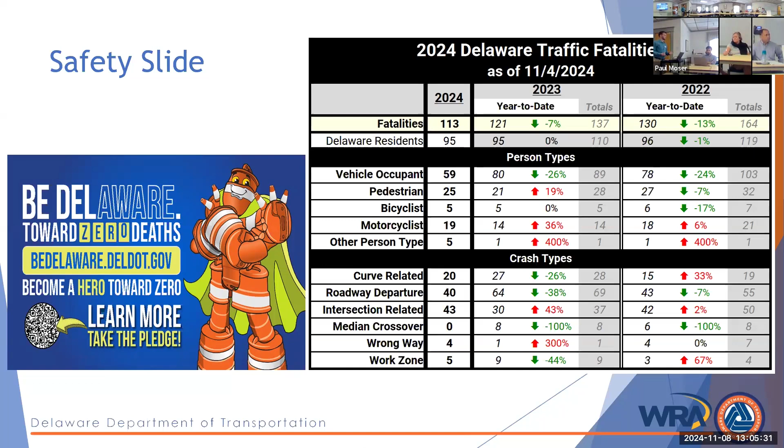Just a reminder to continue to be cautious and be safe on the roads, all the things we know we're supposed to be doing, but sometimes we take for granted.

And then we will go from there, and I'll bring up Andrew to walk us through some of our agenda. Do I need to be up there, Leah? You don't have to be. All right, I'm gonna stay here then. Someone else. Does that mean you have to? I can advance, yeah. Well, yeah, I don't wanna make you up there. Well, actually, you're gonna be coming up in a second anyway.

Hi everyone, Andrew Bing. I help DelDOT with a lot of these efforts in terms of facilitating meetings, keeping things going, staying on track. So that'll be my role here if I interrupt someone or try to keep things moving. That's why I'm here, to make sure we get out at a reasonable time.

So you see the agenda up here in terms of what we're going to do. The first two areas, the welcome and the study area, background and scope. I will be having us go around and introduce each of us. But again, I am Andrew Bing, and we'll be taking on that role. So we're going to focus on the study area, but then spend time with existing conditions and key issues.

Probably the bulk of our time will be spent in this visioning session, where we really want to get as much out of you as we can in terms of what you see happening now. How do you currently get around destinations on 16? We're making that transition from the active transportation plan to really starting to focus on 16 and how you all interact with it. And what do you want to see in the future for 16?

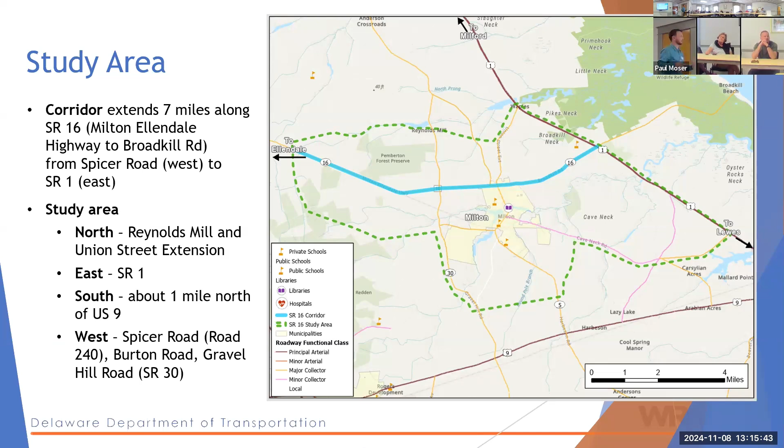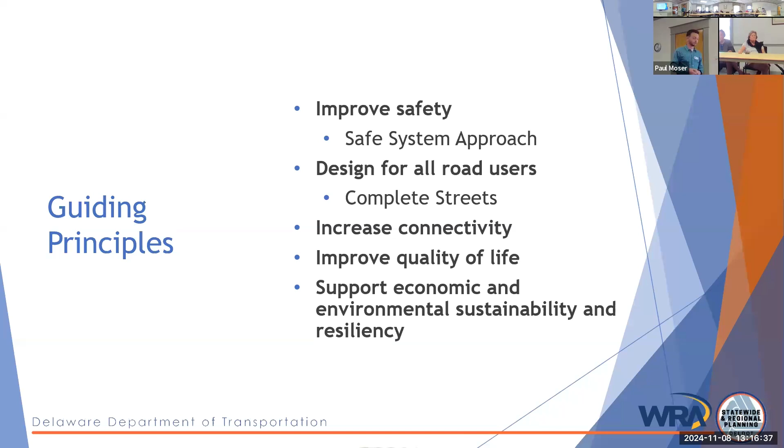In terms of the scope of the project, right now we're working on phase 1, which will go through June of next year, the end of state fiscal year 25. Again, this is a focus on the 16 corridor as it exists today.

Looking at understanding what traffic looks like through the area right now, identifying some of those potential short and long-term improvements. As a result of that, this phase of the study will come up with some preliminary concept designs for the town, for short and long-term improvements. Those will all be documented in a report.

As a side note, this is being coordinated with the ATP, which you all are a part of and have been contributing to. The goal of doing these projects at the same time is that they will have elements that connect and relate to each other, which helps us bring a more comprehensive understanding of the project as a whole to you all when we think about solutions and improvements and things like that.

Then the next phase of our study, which will continue after the ATP is complete, we'll be looking at what kinds of improvement alternatives could come out of something different, right?

So we talk about, we understand, if we're going to change the design of 16 and what kind of traffic and modes it supports, what does that mean for what kind of traffic does the road handle, right? Understanding capacity, things like that. And so looking at and understanding what kinds of alternatives could be implemented to solve issues that came up with our design of 16, what that might look like for you all. So understanding those improvements, understanding what we might need to put in place short and long term. And then as a result of that, we'll put together some concept designs and report those findings and talk about next steps with you all.

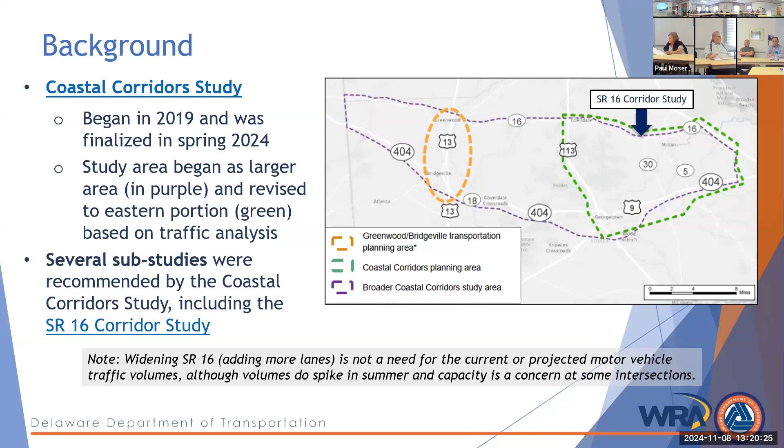Pretty much what I've seen is any traffic problem that you can identify in Milton, if you take time and go to any other small town in the region, you can find the same traffic problem. So we're not by ourselves here. That's for sure, some people's popular opinion.

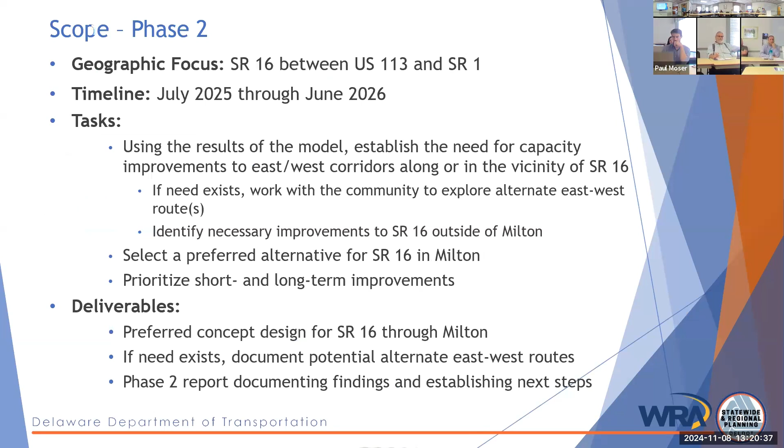Is there someone online who, I saw you guys looking, no? Okay, Jamie Whitehouse from the county has joined us. Okay, great. So we're gonna bring Leah up and we're gonna go over some of those existing conditions.

And spend a little bit more time on some of the things you were just raising. I'm here. Thank you, and Mayor, thank you for raising that point. For those of you who are interested as to how we reached that note conclusion, the coastal corridor study is online and fully documents how we got there. And I will say, that was a very high level preliminary traffic analysis.

And as you all know, growth in Sussex County is at an interesting level right now. It's been really fast, but we all remember back in 08-09 when we thought it was gonna be really fast and then everything went away for 10 years. So the department's in an interesting position where we have to kind of shake our crystal ball and do our best guess at what's gonna happen long-term.

So I will say in the background right now, we are working with DelDOT on their traffic model, which is that goal at kind of anticipating the future. And they're gonna be looking at a low, medium, and high growth scenario. And they'll take what that looks like and what that does to our roads. And that's not just 16, that's the network, everything in that big green area. And then what we're working on right now as to what 16 looks like in town, we'll plug into that. So we'll have a sense for, okay, if we change the street this way, what will that do if we have low growth or high growth? So that is coming next.

But right now, we really think it's important to start with the vision, because really it's your street and it needs to serve your needs and the community's needs.

And if those traffic models do yield more traffic and that note is no longer valid, then we begin to look at the network as a whole. Are there other east-west corridors that aren't through the heart of your town that could work to absorb some of that through traffic instead of sending it right through town? So that's kind of where we're at right now.

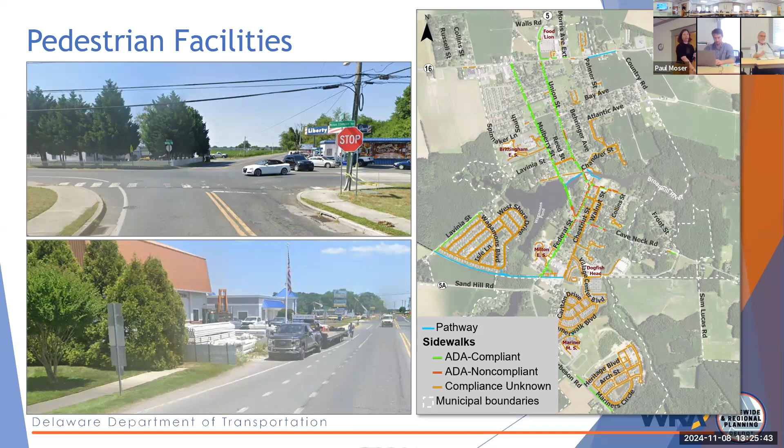I know there's a new light coming in at Mulberry Extended, but that light will not allow for a new crosswalk across 16 because there's no sidewalk to receive that crosswalk. So although we will have a stop there, and improved crosswalks along the road on the south side, we're not getting over the road. So some of those things where it's like, okay, how can we improve on that?

Bike facilities, we've talked about this a lot with the active transportation plan. I'm not going to dwell on it, except to say, again, we have a similar situation where we have side paths. Those are a little wider than sidewalks, right? 10 feet instead of 5. They're designed for people walking and biking.

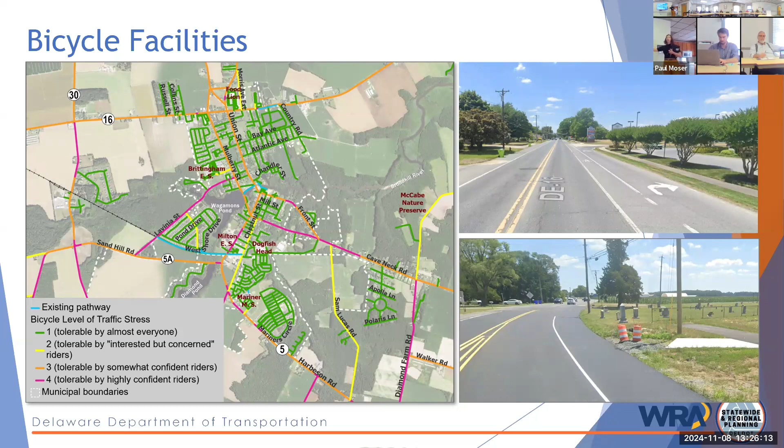Honestly, that probably feels a little safer biking on that than in this bike lane, for those of us who ride. But again, side path - that cemetery is not going anywhere, right? These are constraints we need to work around and figure out a meaningful way to get around some of these things. So just beginning to think about our obstacles.

So the road right now as it works, it is a major collector. It is a state road, as you all know. And the speed kind of tapers down as we come into town from 50 down to 35. I'm curious to hear from you if you feel like people are going the speed limit or not. That's an interesting question when we ask that often.

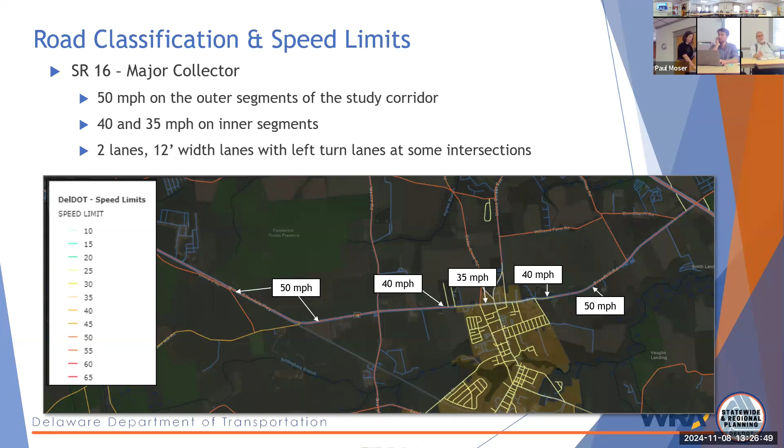That is a key thing we want to do. The road probably, if we want people to drive slower, should feel a little different, maybe a little tighter, to actually have folks realize, okay, we're entering a place where this isn't just a through road. We'll talk some more about that in a minute.

And here's those traffic volumes. Again, these are average annual volumes, so that does not account for that summer peak. We did study that summer peak a lot with the coastal corridor study. There is a pretty good bump. We have numbers for both times of year.

One interesting thing I wanted to point out: the wider and more red is higher volumes. Route 1 and 113 are obviously the highest volume segments. You'll see it's pretty high coming in across 30 into town, but then it gets lighter again between Route 30 and Route 5 and Route 1.

That's because a lot of this traffic coming from the west is jumping south through Milton because they don't want to drive on 1. So they're redirecting and kind of creating their own bypass with local roads around Route 1 to get down there. A lot of that traffic peels off on 30. We were able to look at this in detail with the coastal corridor study, but a decent amount of it continues through and kind of comes down through Milton.

So we know that's happening, and I'm sure you see it every day. You say it comes through on our roads. It's actually your road - yes, it is state roads, but it's your town. It's our town, but it's your road.

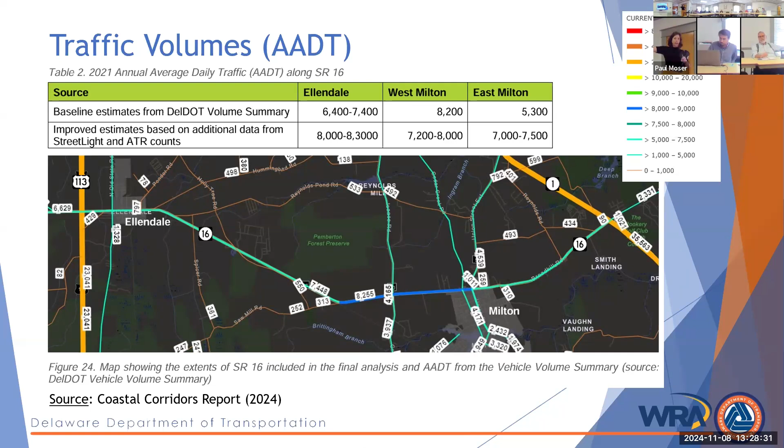Quick thing in the chat from Dara - she mentioned the commercial or residential development on 16 and suggested that eastbound 16 should be 30 miles an hour. Thank you. Yeah, there's also some apartments on 16 and some residential to the west, so keeping that in mind too. Those folks are kind of isolated out there right now, as far as connectivity to the town.

We've also been looking at crash data a lot for these studies. Again, safety is a main goal. This map on the left is pedestrian crashes, and you'll see we have a cluster in the downtown area and then a cluster along 16. Fortunately none of these are fatalities, and this is all the way back through 2009. Looking broadly at vehicular crashes, same patterns - more crashes with cars up on the 16 corridor. So again, we do know there's a safety issue.

DelDOT looks at crash volumes across the whole state and kind of staggers them. So I will say this is not at the top of the list for the region, but it is for the immediate area - that's kind of where we're seeing the issues.

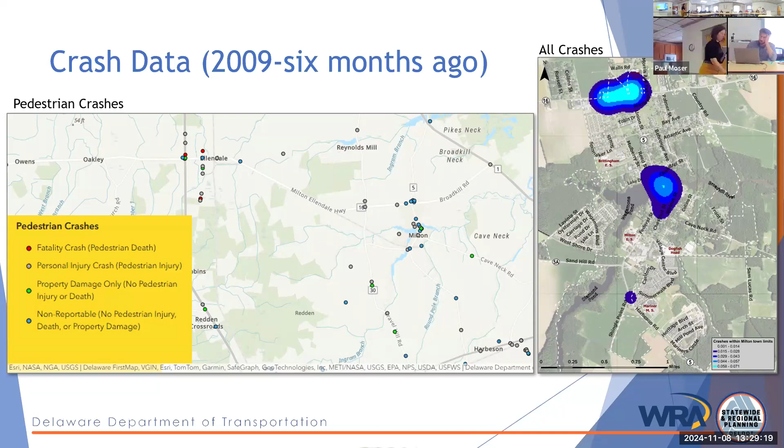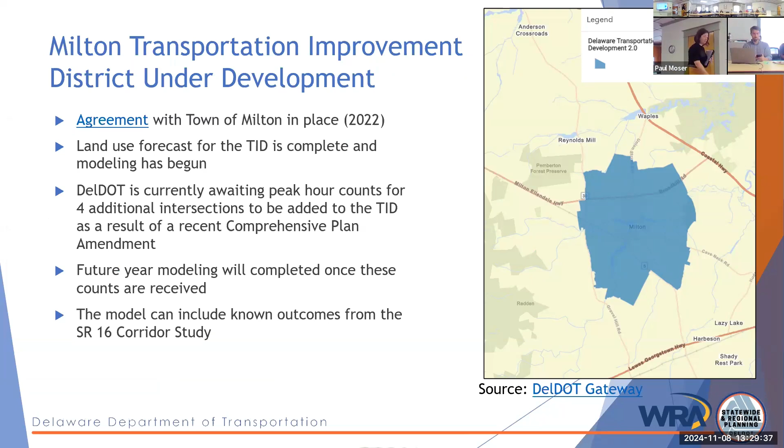We're also well aware there's a transportation improvement district idea floating out there. I know it's floating right now - we don't know where it's going, but we are in touch with Sarah Coakley and the team with DelDOT planning and are keeping our finger on that as it may relate to this, depending on where that goes. We're not going to get into that here now, but we're aware.

I did want to highlight some existing DelDOT projects in the region - by region I just mean the surrounding area. We have two major improvements right now on either end of our study area. At 113 and 16, they're getting a grade separated intersection - that's in DelDOT's budget. We're pretty far out from that, but it's getting built similar to what is under construction right now at 1. So on either end, we're going to have no traffic lights anymore; it's going to be kind of a grade separated configuration. For those interested, there will be bike and pedestrian facilities built into those projects. So those are two major investments on either end of the corridor already.

There's also here at the 30 intersection, a roundabout being put in. All this information is available on the DelDOT website if you're curious about more details. That is a safety improvement because that was a really big crash concern. We have the new traffic signal I mentioned a little bit ago, and then heading down, also the Sand Hill Road at 30 roundabout, and another roundabout down at Cave Neck.

So roundabouts, they're a big safety improvement. I don't want to get into a big discussion about why, and I don't think we're looking at that on 16 just because of space constraints, but a lot of the safety improvements in the area DelDOT is approaching with that kind of roundabout. For those here, we have a card with information about how to get more information on any project DelDOT has going on, you can grab one of those.

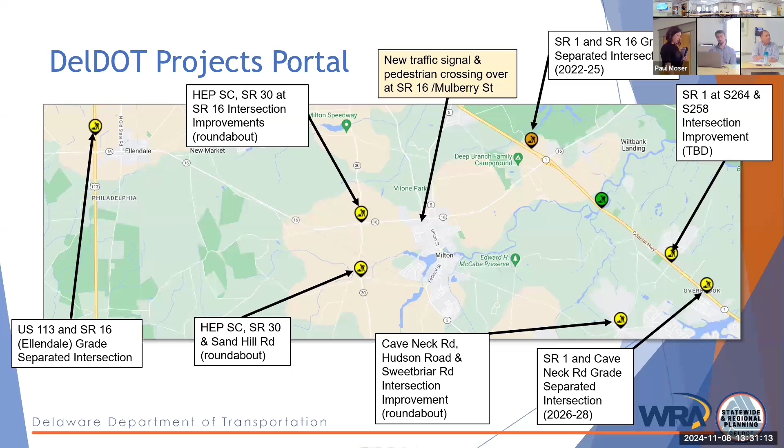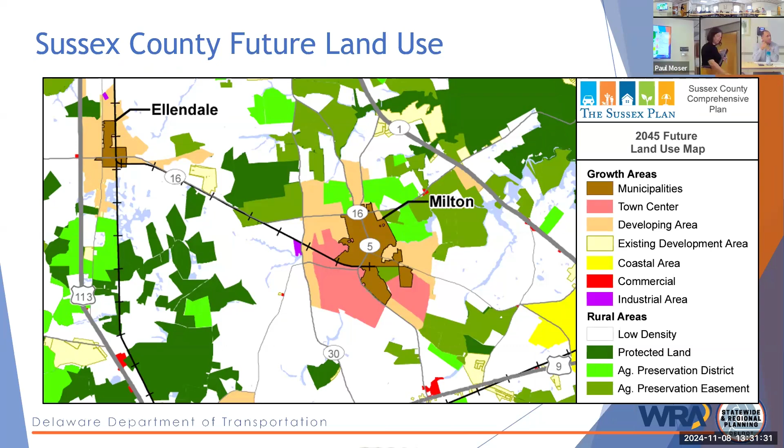So we also look at that future land use. This is the county's future land use map. It does identify the area, obviously municipal limits here and kind of a developing area around Milton. Y'all are growing quite a bit, with the granary and other developments coming in, and again the comp plan for the town also shows some future growth areas north of 16 and heading west. The green areas are agricultural conservation parcels, so they're not going to be contributing to that future volume because they're kind of off the books as far as development goes.

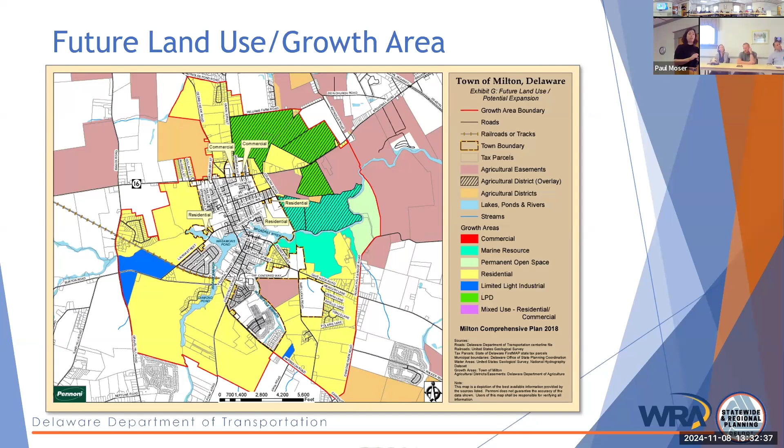And that's actually an older land use growth map. We have a newer one, we'll get the update. Is it on the website yet? Yes, and Dorothy's back there and she and I still have a conversation about the final product, but it's actually got passed, though we're gonna revisit it. Because that's not showing the granary as being part of town, where it already is. So note for the record and for those on the call, we'll probably update the slide with the more up-to-date map before we post it on the website.

Thank you for that. Speaking of development, there's a lot. So the granary, I noted that one specifically because it's quite large and they're actually moving. So that is down here kind of southwest of the town on Sand Hill Road. A number of other parcels kind of bringing town. This really big one is a pretty old one, but it's still out there, so wanted to note that. I don't think it's active right now.

Well, just the southeast corner of 30 and 16, that big purple section there, that's all being developed. Yeah, it's already improved, so it's 600 some homes plus. Yeah, so once you look at this online, we do have the number of residential units in parentheses behind the name. So just so you all know, we are aware of these things and factoring that into the growth.

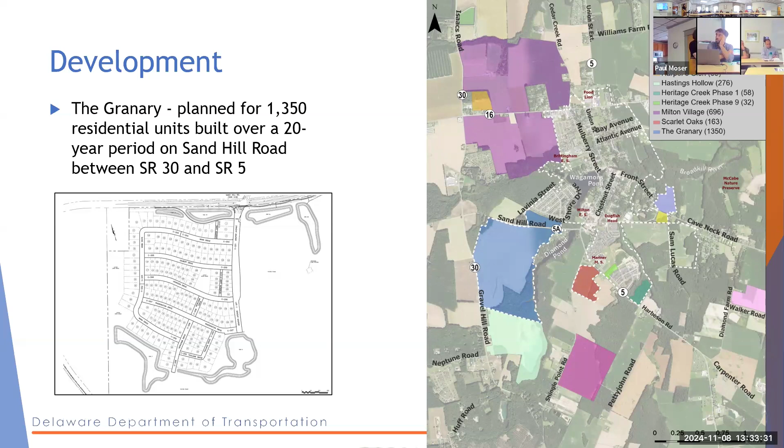I'll keep talking. And again, we've talked a little bit about the agricultural preservation areas and development restrictions, but here's some a little further out of town. So in this instance, it's the blue that are protected.

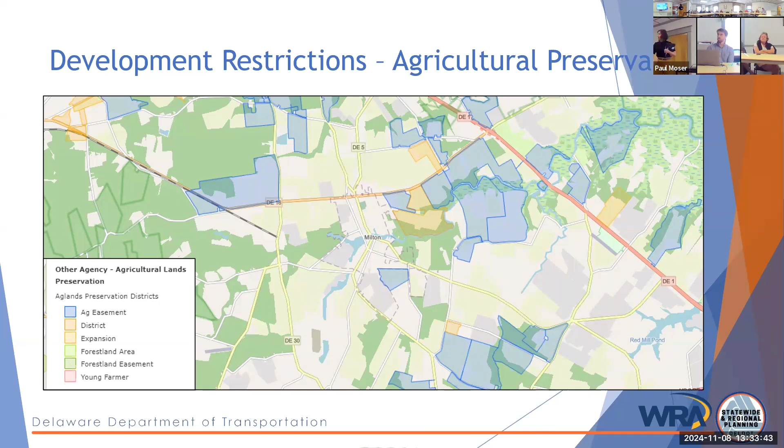All right, so all that to be said, the initial things we've kind of flagged as key issues, and please fill in the blanks if there are things we've missed. We see a need for a long-term vision. Development on 16 has kind of been piecemeal, and that's reflected in the infrastructure out there and kind of the sidewalk and pathways to nowhere. As you know, development coordination reviews, the Royal Farms, McDonald's, stuff's getting done, but there's still not kind of a holistic connection to how that's done. It's still kind of piecemeal.

We know we don't have good facilities for people walking and biking. And also getting across the road is a problem, right? We only have one signalized crosswalk to get over the road, and that's not ideal if you're trying to walk or bike for transportation. And even for driving, it kind of funnels. I know the most complaints I had from folks were folks trying to get around that light at 5 because they get stuck, that's kind of the pinch point. And obviously with the development right up on the intersection, there's not much room to widen and have more turn lanes or anything like that, especially on 5 itself.

So that gets into that access management also, like how you get in and out. Paul and I were getting gas at your gas station at Mulberry Street Extended, and getting in and out of that was a treat.

We gritted our teeth and went for it. What's that development activity gonna look like? If we have a master plan, we can start having a conversation with development as it comes in, saying this is what we want, so we have consistency along the corridor.

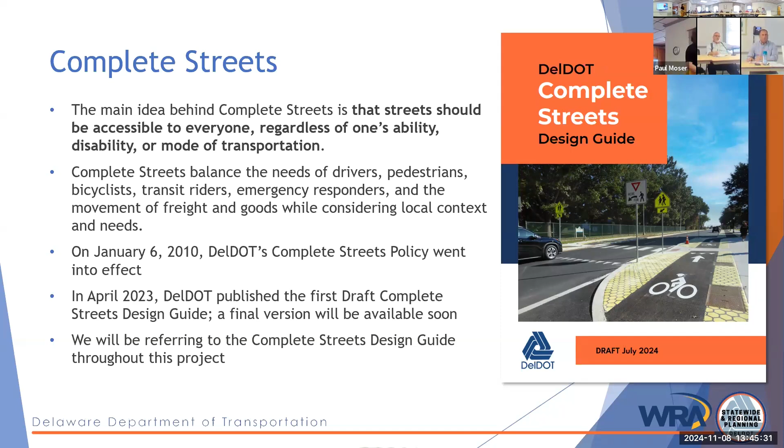So we mentioned complete streets a couple times, and there is a DelDOT complete streets guide. It's in the process of being finalized, and I'll let y'all know once that's final. But it really does give folks like Paul and Austin more guidance as to what we mean by complete streets, what kind of facilities we're talking about, and we're going to walk through some visuals from that document now. We think it could be a really useful tool to get us thinking about what this means.

As we're going through this, at the end of this section I'm going to pose three questions, so I want you to be thinking about them as you're hearing the information: how do you currently get to places on 16, what do you currently experience traveling that corridor, and what do you want to see in the future for that corridor? So as Leah's providing information, balance that with how you want to respond.

Thanks, Andrew. So one of the biggest things with complete streets is speed management. I know you all have the traffic calming committee and a pretty good understanding of that, and the reasons why are illustrated by this chart. We're literally talking about protecting bodies from trauma and death, and we know the lower speed cars are driving, the more chance we have of survival.

Also at conflicts like a driveway, it's a little less terrifying if a car is going 20 or 25 - they have time to stop, they have time to see you. When cars are traveling at higher speeds, that's more of a problem. So that's the big thing for protecting vulnerable users - people on bikes, people walking, people who aren't protected by a metal cage - but also for people driving.

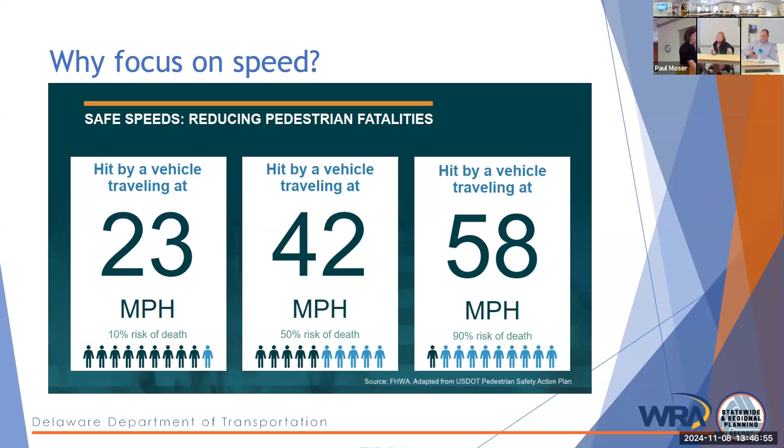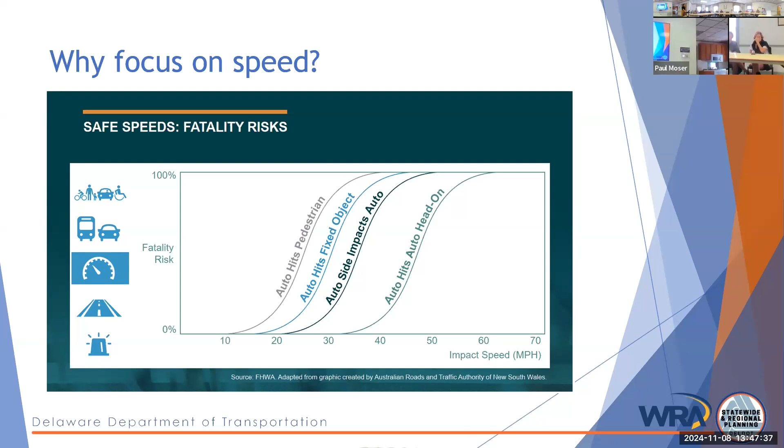This chart gets more into it - yes, a car hitting a pedestrian is the most dangerous. We have speeds across the bottom and how risky a fatality is, 100% being up here and 0 down there, so you see that curve. But a car hitting a fixed object - Austin mentioned some of the fatalities this year are cars literally departing the roadway into people's homes - that's dangerous for the driver too. It's also been fatal in crazy things like hitting a pole, hitting a tree, side impact, cars hitting the side of another car, and head-on crashes are even worse. So that curve shows you're not invincible out there. I know a lot of people drive like they are, but we want to protect people driving and we need to design for that.

So looking at the Complete Streets Guide, it puts out some sample street types - how could streets work? Obviously this isn't what your downtown 16 looks like, but it sure looks a bit like what it looks like a little to the west and a little to the east.

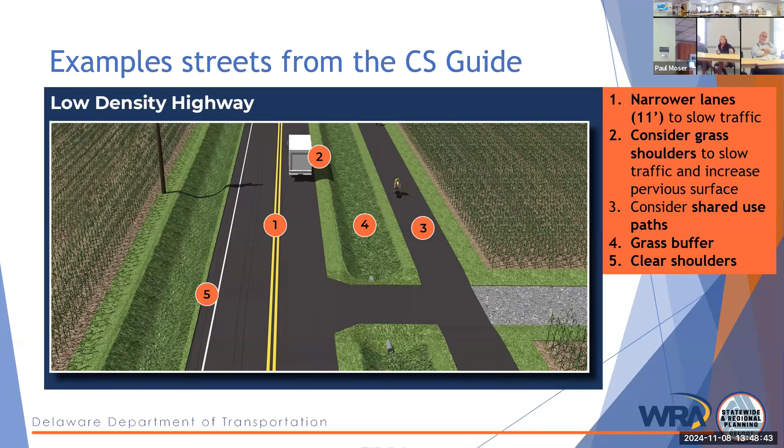So this is the typical ideal street we should be aspiring to if we're a low density highway. Low density means - what do we see on either side of the road? Very low density, an agricultural area. Some things to think about: narrower lanes, considering a grass shoulder instead of really wide asphalt shoulders that make the road feel open and make it feel like you can go really fast. The shared use path, having a nice grass buffer between the edge of the road and that pathway - these buffers often function as drainage too, and keeping shoulders clear of debris. I think we can all think of places like that.

It's what you could see, what you could plan for if that's the vision to aspire to long term, but it's not what's there right now. That would require changes to your zoning.

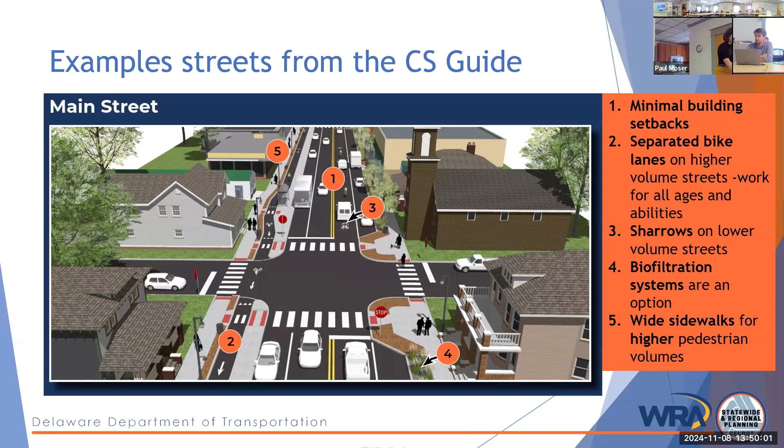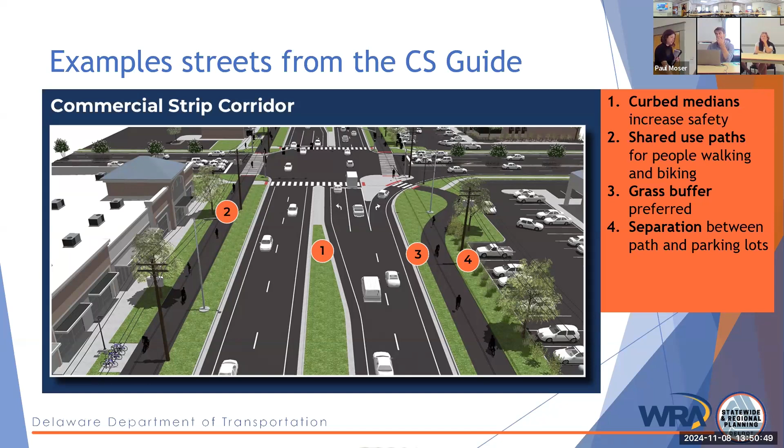Well, we have a lot of legacy buildings, if you will, along that route. And thinking about adding more space between those buildings - you just can't pick a building up and move it back. It's just not feasible. I mean, I've seen it done, but I'm sure y'all who have been here for a long time, it looks a lot different now than it did 20 years ago.

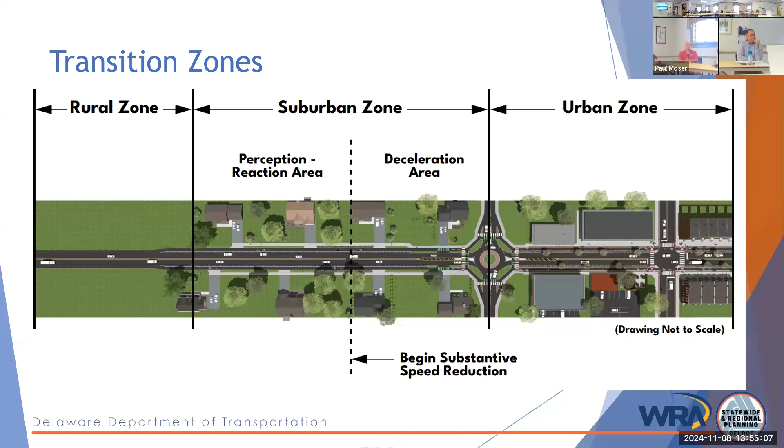So Leah's going to go through some examples of different things that have been done in different places. Again, no two places are ever the same, so there are obviously differences, but this will help everyone think about what could be, what's happened somewhere else.

You have a lot of pavement out there right now because of those big shoulders, so you do have space, right? Their shoulders, maybe they don't need to be 8-10 feet wide like they are right now. Maybe we can reallocate some of that space already in the right of way to something else, right?

Everyone trying to use it as a passing lane gets stuck behind and has to wiggle around. So often there's more throughput and efficiency with a 3-lane section than a 4-lane section.

In some places we can study that, we can understand that. I know some of your improvements—the Royal Farms and the McDonald's coming in—are going to start putting in turn lanes at the intersection.

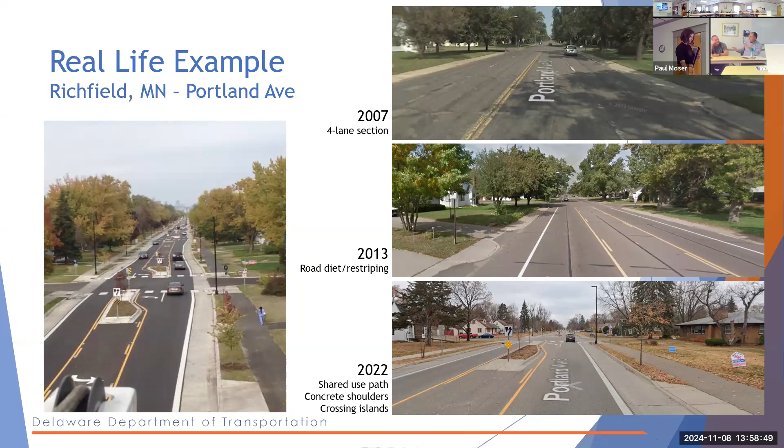I'm gonna use the powers I've given myself as facilitator. It's a good discussion, but we want to be above this discussion. We're getting into sort of the micromanaging of it, and we want to be much higher up in our thinking right now. But I appreciate the conversation, and you're right, the laws are the laws right now.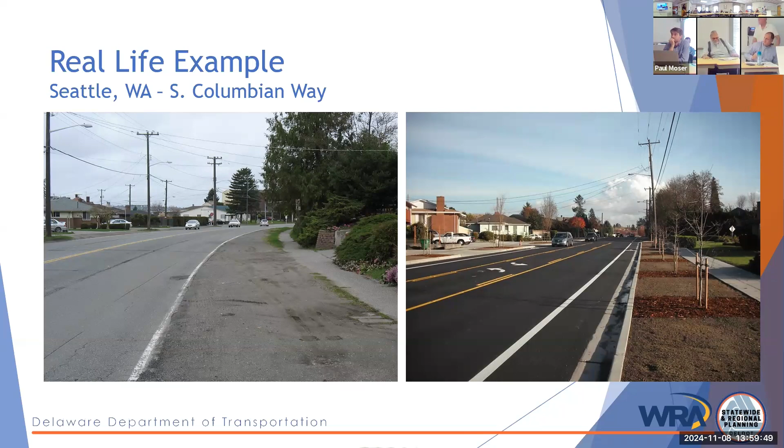Yeah, the time, yeah. Come grab a seat. Come on over, have a seat, Jim. Yeah, go grab one of those seats. And when the meeting's over, just sign it, you don't have to do it now.

And another section of that same corridor, the gas stations made me think of some specific locations. We're not changing everything, but a little bit of improvement works, having curb where there's open space, cleaning up some of these areas with striping and making sure folks know where they should be. This isn't a huge wholesale change, but you really can do a lot to tell people where to be.

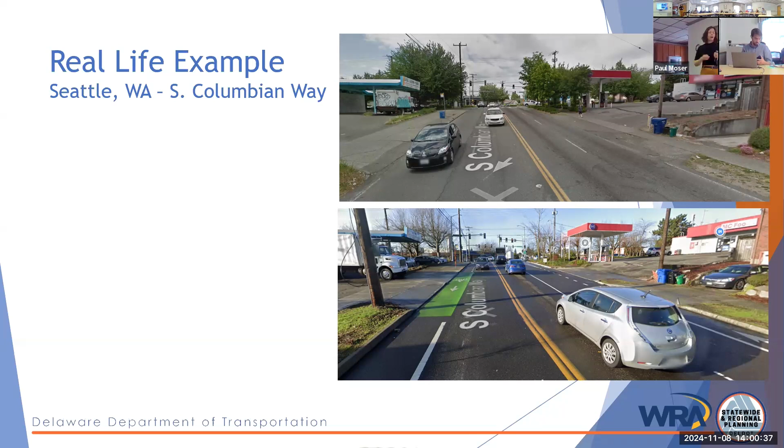We created a bike lane, and they were able to see maybe we don't need 2 lanes in that direction, but we still need 2 lanes in this direction, playing with some of the space we have for efficiency. This real life example is continuing to iterate, but here's kind of our interim condition. So this is just some thoughts on how other communities have approached this.

So then I'm gonna walk us through what we look at, and I know you all drive this corridor a lot. Just gonna walk us down from starting to the west of town and coming through. So the Russell Street area, the homes over there are kind of isolated right now. There's really no way for them to get into town safely without walking or biking on the shoulder.

Coming through, again approaching Mulberry Street, this is the place where that new light's going, but folks still aren't gonna be able to get across. We have a nice new sidewalk going in right now though, that's a great improvement, a step in the right direction.

Continuing, approaching Route 5, we know Royal Farms is gonna be coming in, so for that overgrown mass of trees, there will be a side path. So that's a side path on one corner, but then across the street at McDonald's, we're back to a sidewalk again. So that speaks to that kind of, okay, what are we doing?

One or the other. And arguably, some of the biggest constraints around what we can do are these businesses through here, right? They're very close to the road. The only parking they have to support their businesses is right off the road. So these are some of the realities we're gonna have to work with.

There's a storage facility on the right-hand side that's going in, and we'll have a multi-use path, but it's gonna stop along your parcel there. No, back up, because there's a lot in between. So it'll be there, and then there'll be a gap. A kind of dead end anyway.

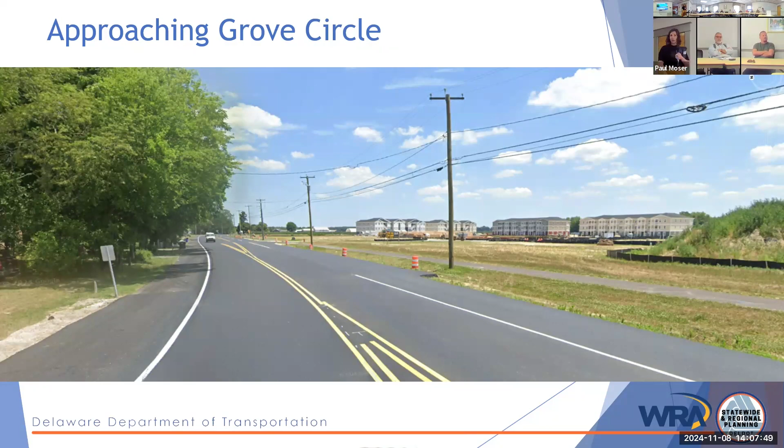Heading out to the eastern edge of town with the other new development - and this is an old picture, so obviously this striping has changed a bit since then. But again, other new development is putting in a side path that terminates, with kind of an on-ramp for bikes getting back onto the road if they're continuing. So that's just walking through roughly what's out there right now.

So we've been talking about this a bit already, but your questions are on the screen. We want to have discussion right now, trying to get at a higher level. We don't have to take these in order, or even stick to these questions - it could be anything you all want to talk about. But it's helpful to have a couple prompts so people have an idea of what we're looking for. What do you want to see for Route 16 in the future? If you had a wish list of three things you would want, what would those three things be?

For the people on Zoom and here in the room, we clearly won't have enough time to go through this - it's not like we have three hours. So I want to encourage you, if after this meeting you have ideas and thoughts, you can email them to us. You can take time to really think about your thoughts and share them with us in writing as well. So if anyone wanted to jump in.

We'll go to our new gentleman here. I apologize - I thought this was just going to be a walk-around exhibits kind of meeting, like an open house, like the one that was held down at the Milton Consolidated School. So I apologize for coming late and not understanding the format. I saw the article in the Gazette.

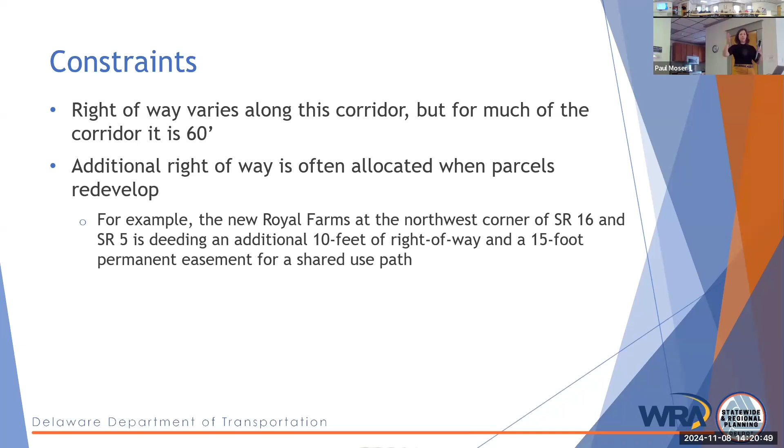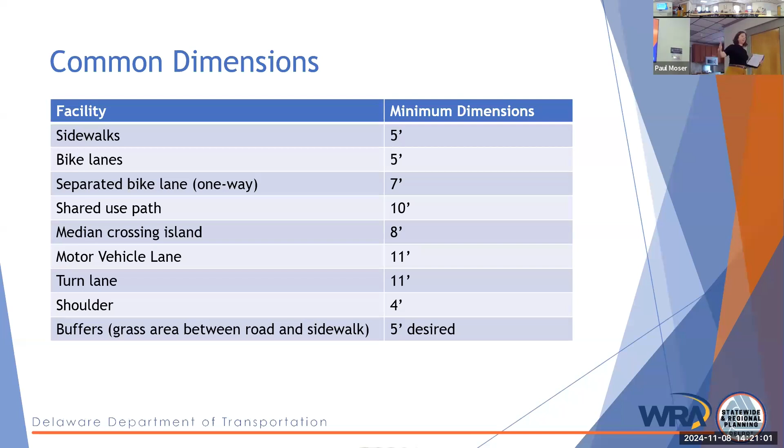As transportation professionals, we know we have minimum dimensions for things. A sidewalk's gotta be at least 5 feet. That pathway we've been talking about has gotta be at least 10 feet. You need at least 5 feet of space between the edge of that pathway and the edge of the road. So all these things add up. Looking at what's out there now, we have space - how do we use that space?

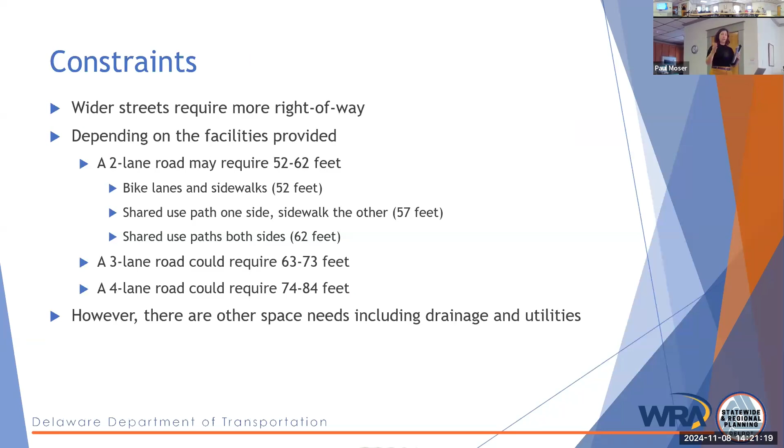Getting into our facilities - a wider street, whether that's more vehicular lanes, which I don't think we necessarily need, we may need a turn lane here or there, need more space. So here's our 4-lane complete street. If we start adding the bells and whistles onto this - this is very abstract, it's only an estimate, I just drew a box on an aerial photo - but if we go from the center line, having lanes for cars, a turn lane, and also that buffer space and a pathway, we're starting to get out there, and we have homes.

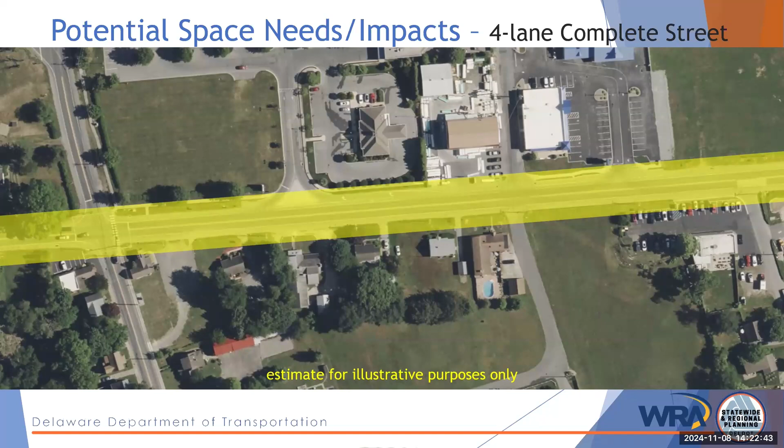All right, Austin's gonna speak a little bit about that next step of the public process before we wrap.

Before I mention specifics, these are just when we're targeting outreach. We're always happy to take comments, feedback, suggestions at any point in this process. Never feel like you cannot reach out to any of us, provide comments, ask questions at any point. The first bullet talks about our online interaction - that's constantly updated with recordings of these meetings, online surveys, materials, presentations, the slideshows, all of that stuff, resources for you to check out online. We update that after the meetings.

The number 2 is the point of this group, right - the meetings we're having today with you all. We're at number 3. We'll have 2 more meetings early next year and then 1 later in the spring. To the point about the workshops we've had already, we already had one. We've got another scheduled for December 3rd, a little under a month from now, and that'll be another drop-in time for the public to come in and see what we've been talking about so far. You all as tag members, we really want you to be the ones to advocate for this project to your community, your residents, whatever organization you're representing. That's why we have this group together - for you all to be that voice to folks out in the public.